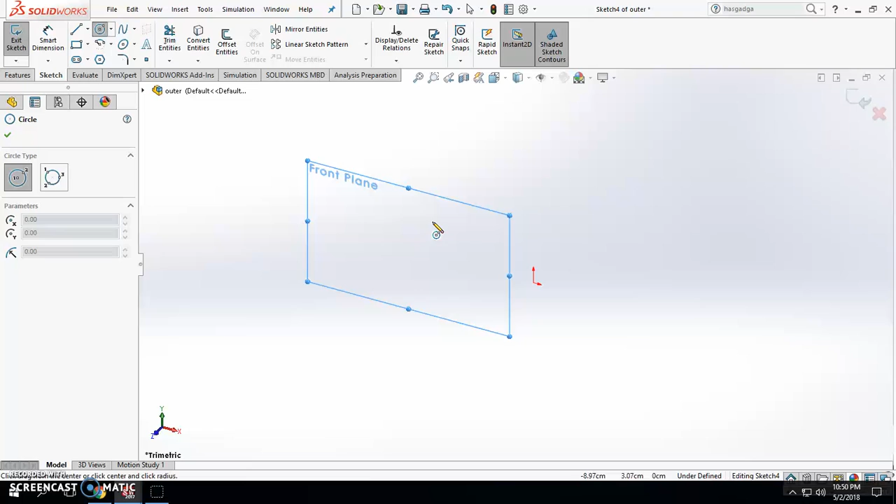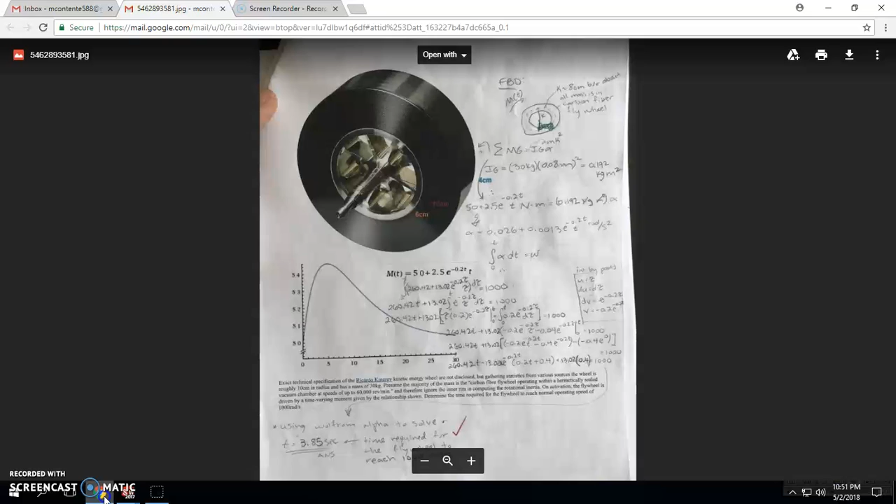Make sure that you are in centimeters. So radius is 6, and now for the outer radius, which is 10. And from there you're going to extrude 4 centimeters.

Now from here you can change the color. You obviously don't need to do this, but I find it easier later on when you're putting two parts together.

For the inner part, I'm just going to have it made already because it would take too long to do this. You don't need to do this extensive, but I just felt like going for awesomeness points.

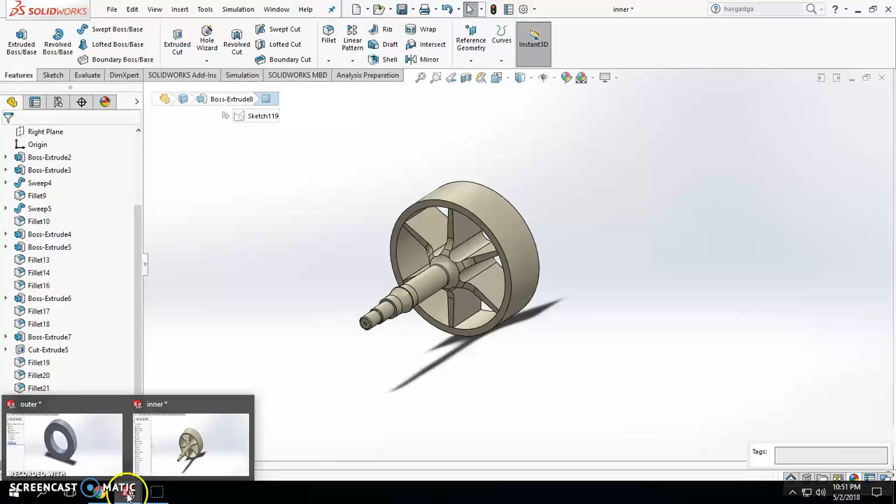Now we're just going to go into an assembly and insert both parts. When you're making the inner part, just make sure that the outer radius is 6 centimeters also, otherwise they won't mate properly.

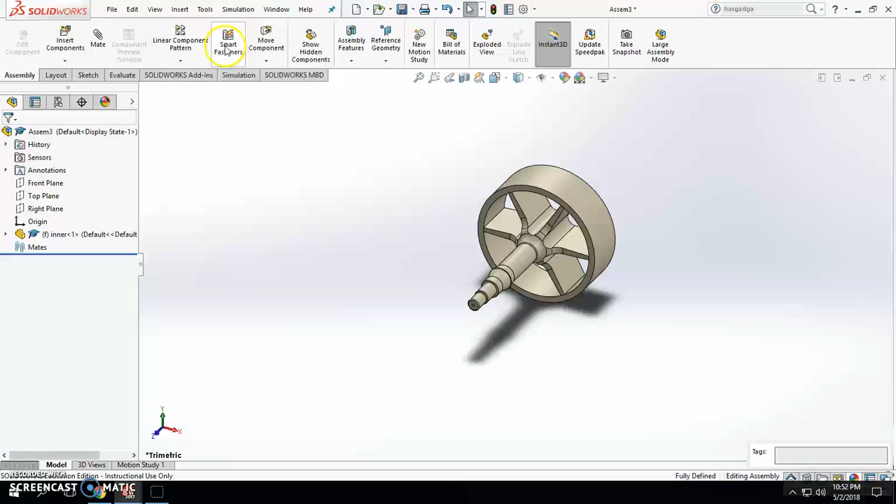And now we're just going to mate these together. Alright, now before you go into the motion analysis, there is one important thing you need to do, and that is just the masses.

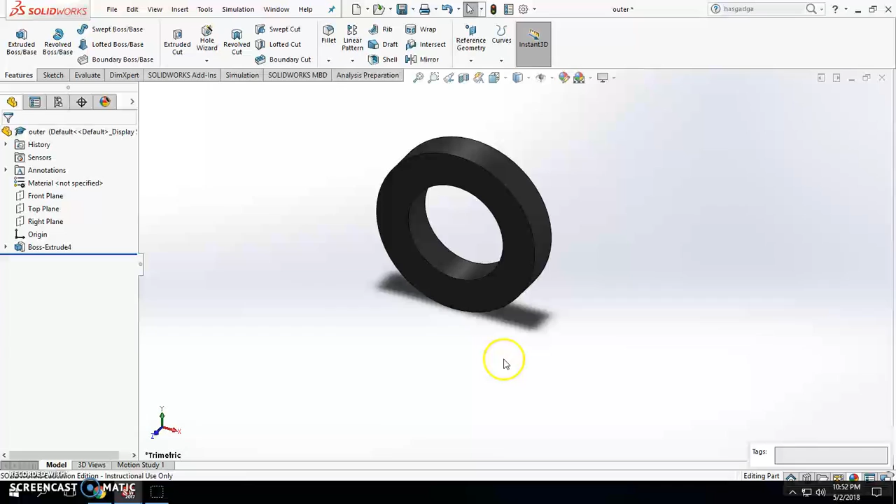So in this problem it is only focusing on the mass of the tire itself, so the inner part is irrelevant, but you'll see why it is actually relevant for the simulation later.

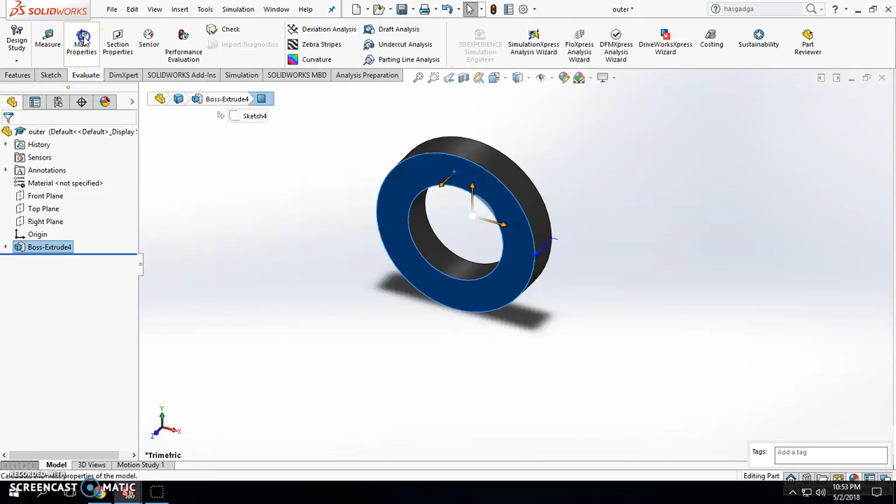So first we're going to say that the mass of the tire—if you go to evaluate and mass properties and override—we're going to say the mass of the tire is 30 kilograms, or 30,000 grams in this case.

And all set. Now this part's important: this is actually going to be 0, because, like I said, this part is not exactly relevant to the calculations by hand.

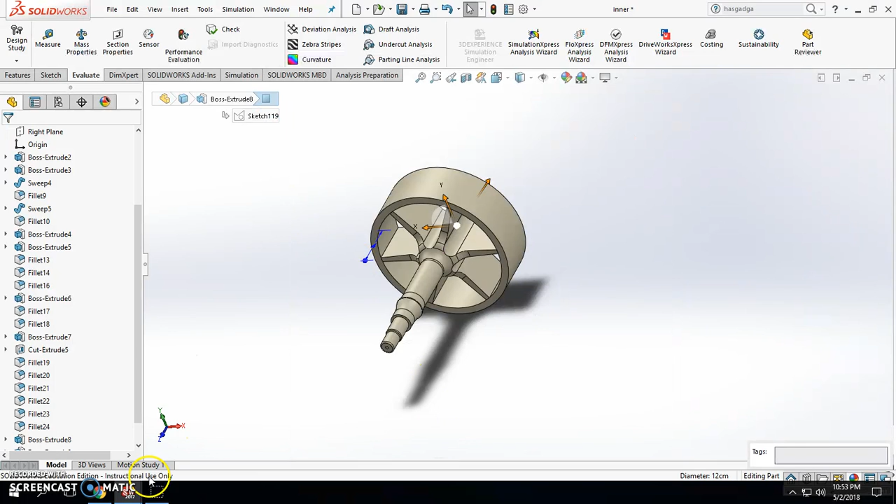But this isn't actually 0 though. This is just 10 to the about -6 grams, because if you actually put in 0, it just won't let you do it, because it would be as if it wasn't even in the simulation.

So now we're just going to go to assembly and motion study. Now make sure you have your add-ins. Motion, good.

Motion analysis. Now what we're going to do is add a torque, which is just a moment in this case. So in the problem, it says we are given this equation of moment, which is this.

All you're going to do is scroll down and go to expression, which will allow you to type in this function. And just make sure you get all of your mathematical functions correct—they're all listed down here if you need to check.

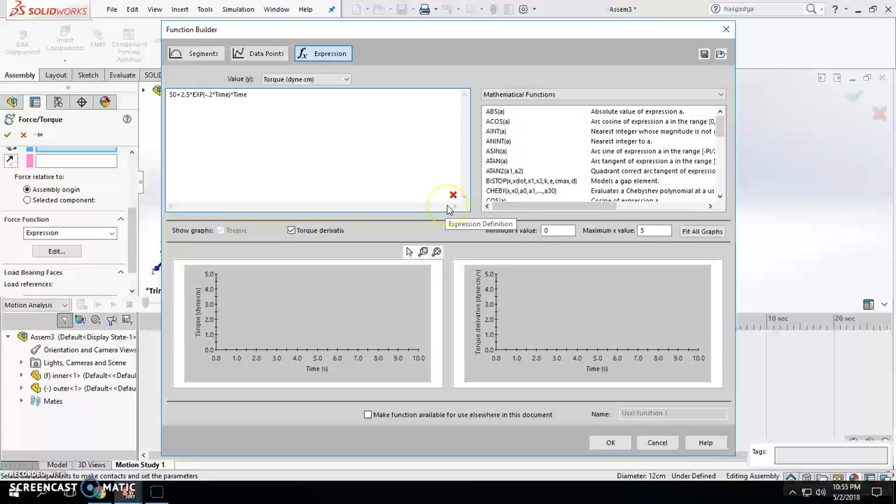And check mark up here. Alright, so when you see this at first, you might not think that it's the right graph, but actually, if you see here, it goes all the way up to 30. So all you need to do to confirm that it's correct is go to maximum value of x to 30 and fit to all graphs, and you can see that they're clearly the same.

So from here, press OK, and we are going to apply it to this face right here. This motion is representing where it will move, and this is obviously how the tire will move, so that is the right way.

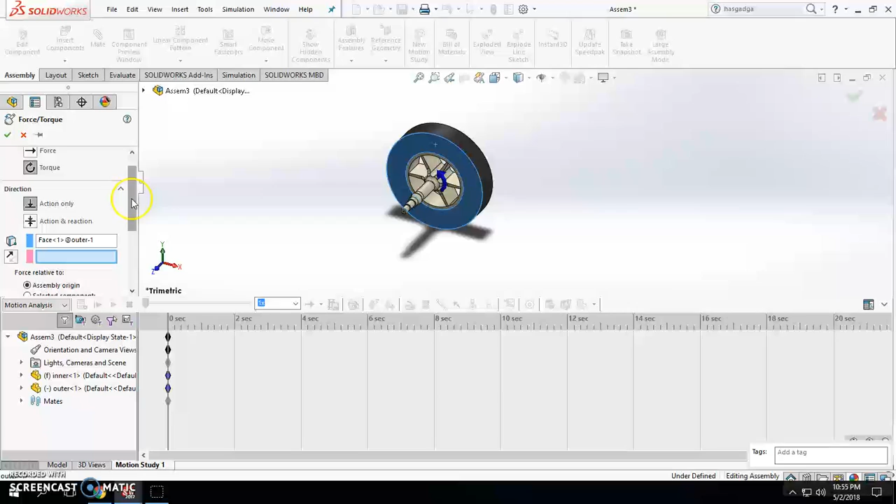And check. So when running the simulation, probably the best way to do this is to solve backwards. Essentially you're using the value you calculated to try to find the angular velocity, which is given.

So the best way to do this is just to zoom in and find the calculated value, which is 3.85 seconds.

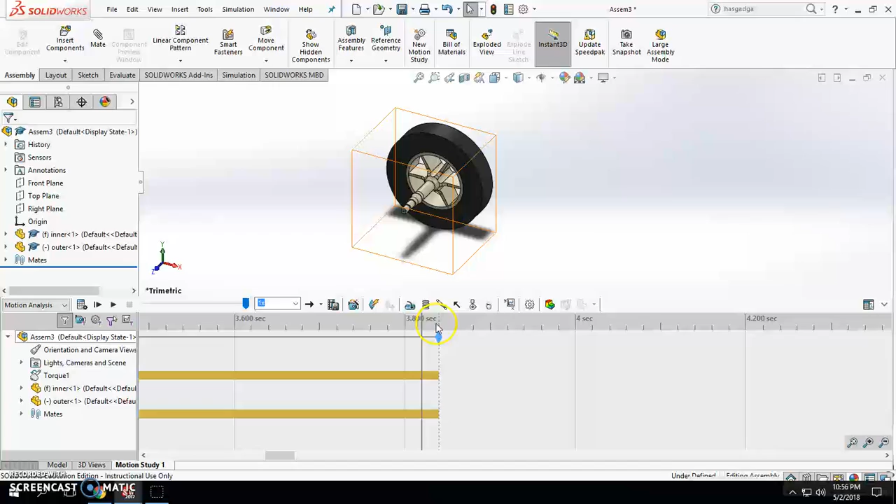So you need to pull this back because this will stop the simulation wherever you have this, for 3.85 seconds. So this is good.

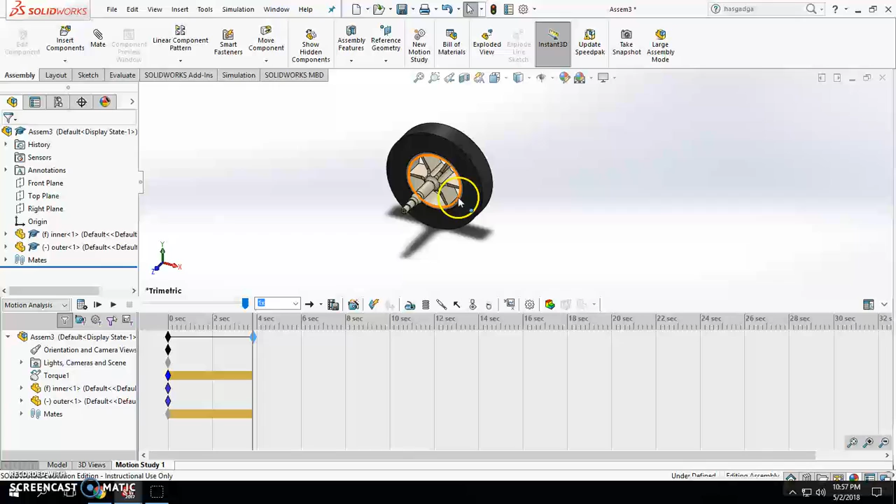And now, before you actually run this, another important thing is to just make sure that the inner is fixed, which is just the gray part, and then the tire is not fixed because the tire is the only thing rotating. This is the important part of making it two parts in this case, because it's acting as if this is pretty much just stabilizing the tire, so the tire is moving freely.

But obviously if you were to not have this here, then you can't fix it and have it rotate at the same time, so it would just fall or do nothing. So yep, now we are just going to run it.

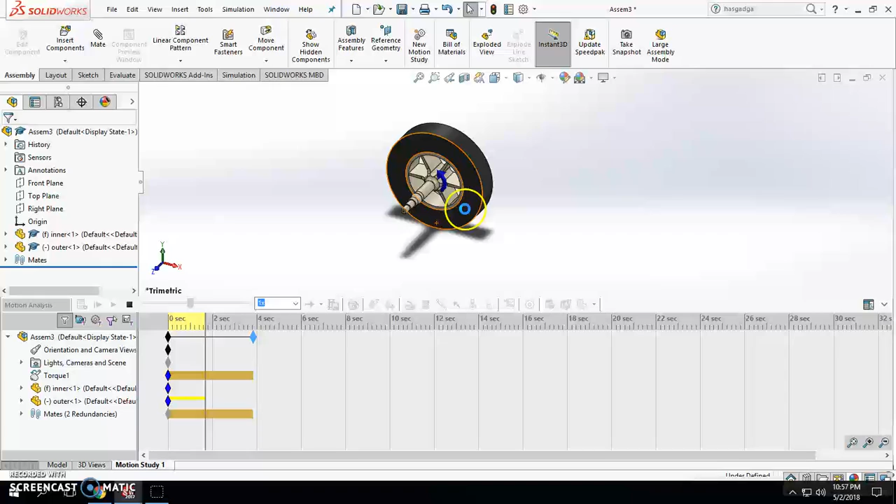And we're going to plot for angular velocity, and it's going to be in the z component because it's rotating about the z-axis in this case.

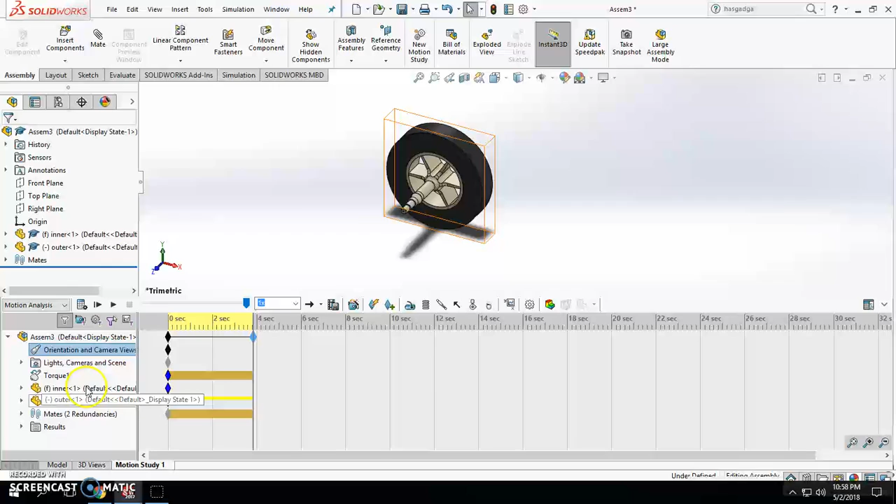Didn't seem to want to work. Alright, let's try this one. It's the same thing.

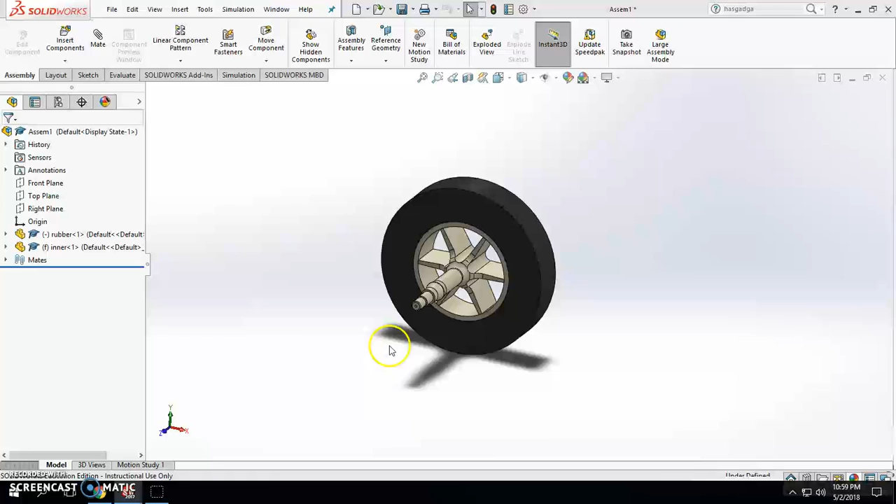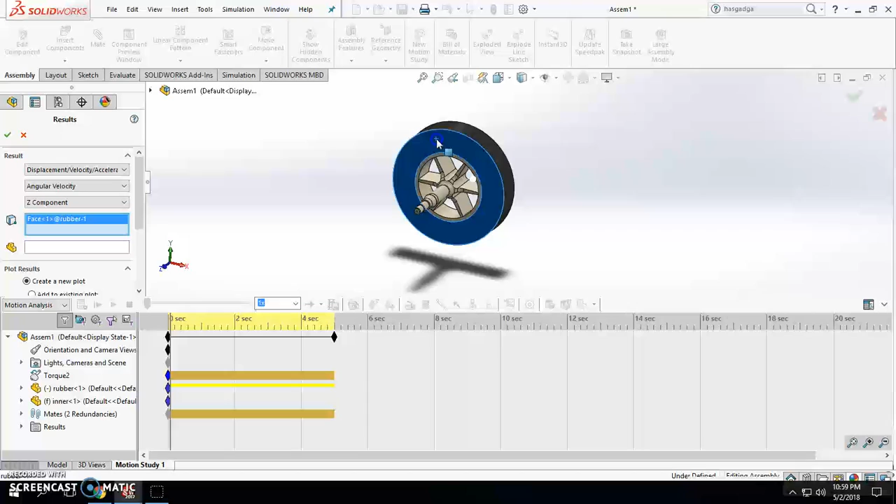Okay, so everything's the same here. We're just going to plot for angular velocity, in the z component. Select this face, and need to roll back time again.

So now, if you go all the way to the end, you'll see 57,234 degrees, and...

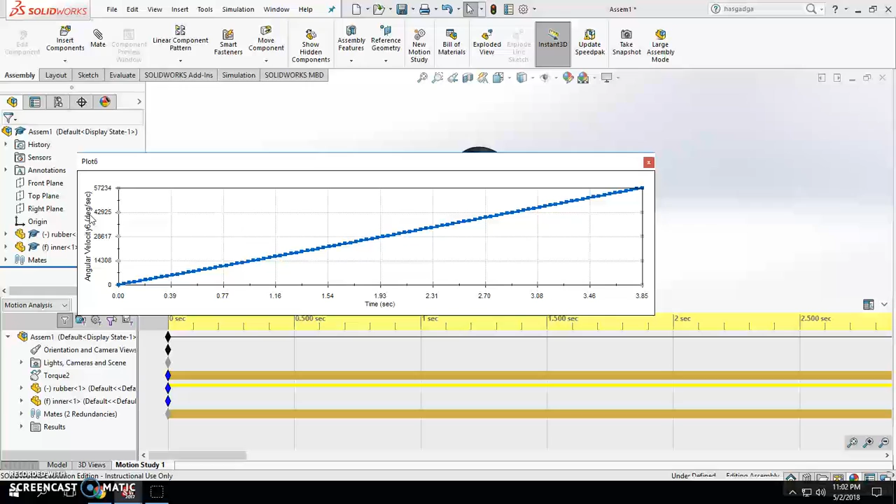If you just multiply that by pi divided by 180 to convert it, you'll find that it's 1,000 radians, because right now it's in degrees, but if you just convert it using that, you'll find it in radians, and that is 1,000 radians. So that's the same thing as the problem. So working our way backwards, we found that this is actually the right time.